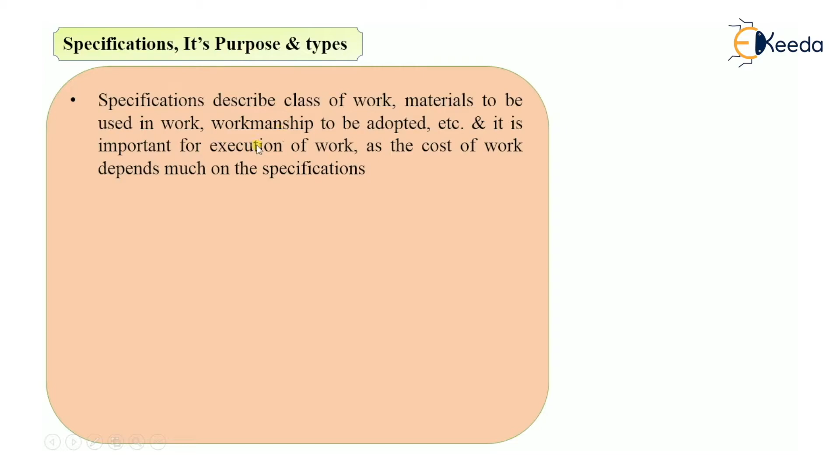Then what type of workmanship you should adopt for a particular item of work, that is described by the specifications. And see, it is important for the execution of work, as the cost of work will depend upon specifications. See, specification will give you nothing but the quality of material, what type of workmanship you should adopt. So mainly, what are the main factors that affect the cost of work? They are materials and workmanship. So as the specification describes the material and workmanship, the cost of work will depend much on the specifications and also on the execution of work.

And see, specifications are nothing but written requirements for a material, what type of material you should use, or written requirements for the service you are providing for a particular proposed project, such as buildings or bridges or roads, etc.

Then it also forms an important part of contract document. Why so? Because it gives you a proof about what type of material you are using, so you can compare whether your contractor is doing the work as per the contract document, as per the specifications, what quality of material is mentioned in the specifications. So whether the contractor is doing the work as per the specifications or not. So it will form a very important part of contract document.

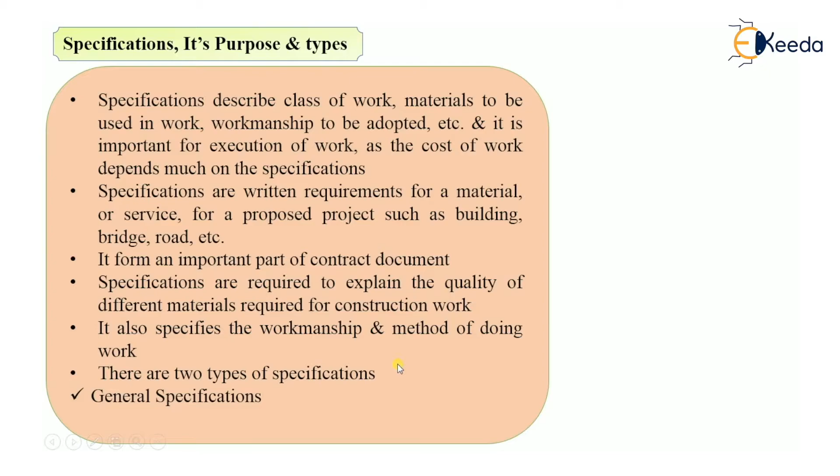And specifications are required to explain the quality of different materials. It will explain what quality of material you should use, each and everything about material. Then it also specifies the workmanship and method of doing work, as I told you previously. Then there are two types of specifications. First one is general specifications and second one is detailed specifications.

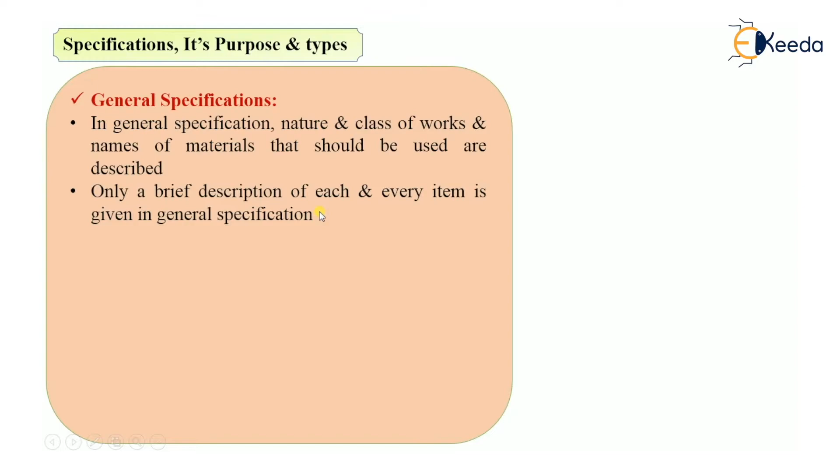Let's see first general specifications. See, in general specification, nature and class of works, then names of materials that should be used are described. What is described in general specification? Nature, class of work and names of materials. And see, only a brief description of each and every item is given in this general specification, not a detailed one. As the name says, it is a general specification only, so it will give you a brief description of each and every item.

And general specifications do not describe any particular item of work, but refer to the complete work. See, this is a very important point. General specification will not describe any particular item of work. It will just give the brief description about each and every item, and it will give total description about the complete work. It is useful for estimating the project, and it does not form a part of contract document.

As specification is nothing but a proof for the contract document, we cannot use general specifications in case of contract documents. So it will not form any part of contract document. You cannot use this type of specification in the contract agreement or contract document.

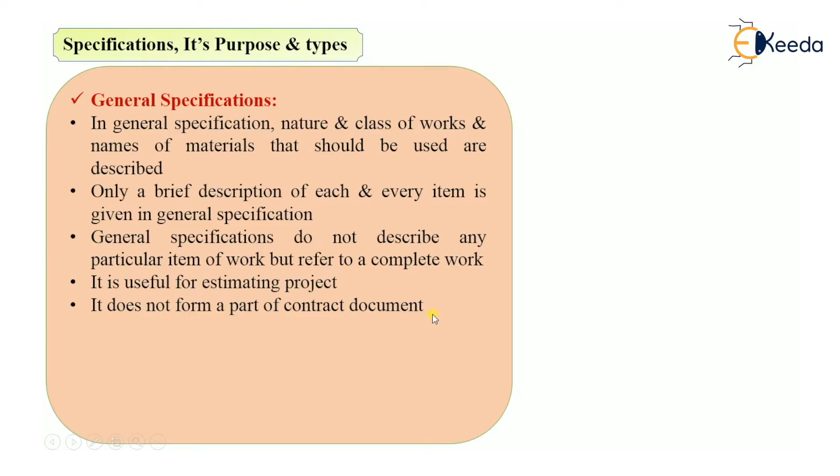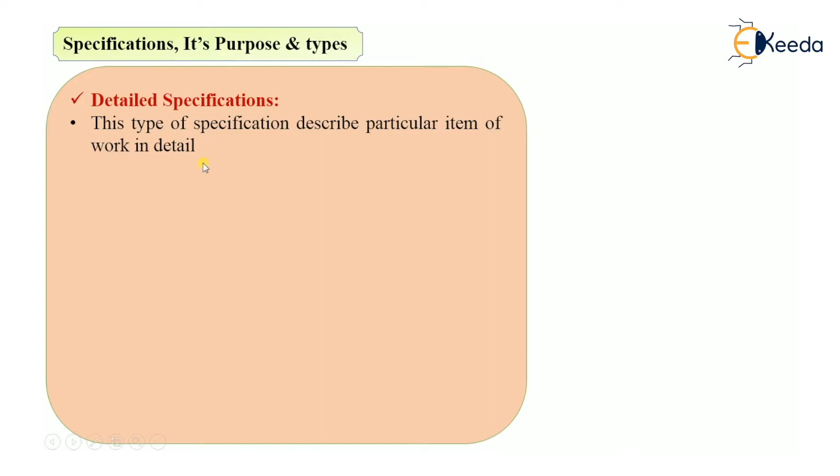Then the second type of specification is detailed specification. See, this type of specification will describe a particular item of work in detail. As the name says, it will give you the detailed description about the particular item of work. And the detailed specification will form a part of contract document, as it is giving complete guidance about the material to be used, workmanship to be adopted. It is giving complete description about that particular item of work, so it will form a part of contract document.

And detailed specification specifies the qualities, quantities, and proportion of material. What quality of material you should use, in what quantity you should use it, what should be the proportion of various materials, for example, if you are using concrete, what should be the proportion of concrete in a particular item of work? Then what is the method of preparation and execution of a particular item of work in a project? All these things are described in detailed specification.

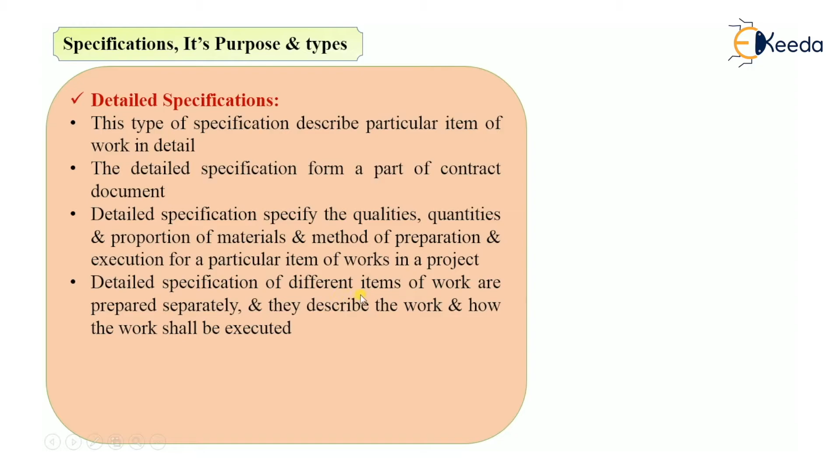Then detailed specifications of different items of work are prepared separately, because we have to give detailed description of each and every item. They describe the work and how the work shall be executed. In detailed specification, it is also given how you can execute the particular item of work or total work. While writing this detailed specification, the same sequence is maintained.

Remember this, whenever you are writing the detailed specification, the same sequence is maintained as the work to be carried out on site. Means if you are doing the excavation, then you are doing the PCC. So you are writing the detailed specification in the same manner as the work is to be carried out on the site.

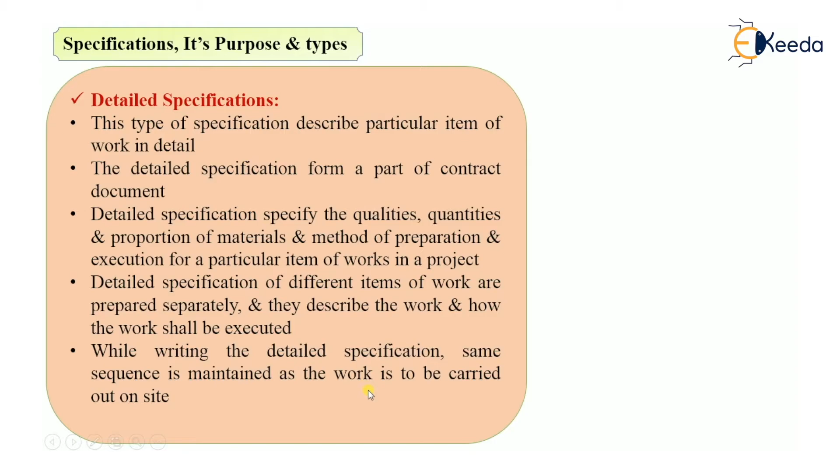Now let's see what is the purpose or what is the importance of specification. Why we use specifications? We have seen this in the description, but in the exam it may ask to write down what is the purpose of specification, what is the importance of specification. So from exam point of view, you have to write down some of the points, maybe 8 points, 10 points. So let's see them one by one.

What is the purpose or importance of specification? See, the main purpose of specification is to provide the description of work, necessary information which cannot be obtained from the drawings. As we know, drawings will guide you about the work, but there are some points which cannot be described in the drawings. So for that you will have to refer specifications. Specification will give you the description about the work which cannot be explained in the drawing or obtained from the drawings.

Then specification of work is required to describe the quality and quantity of different materials required for the construction work. As I told you in the previous slides, specification will describe what quality of work you should use, what quantity of different material you should use, and what proportion of material you should use in a particular item of work. Then it forms an essential part of contract document; especially the detailed specification will form a part of contract document.

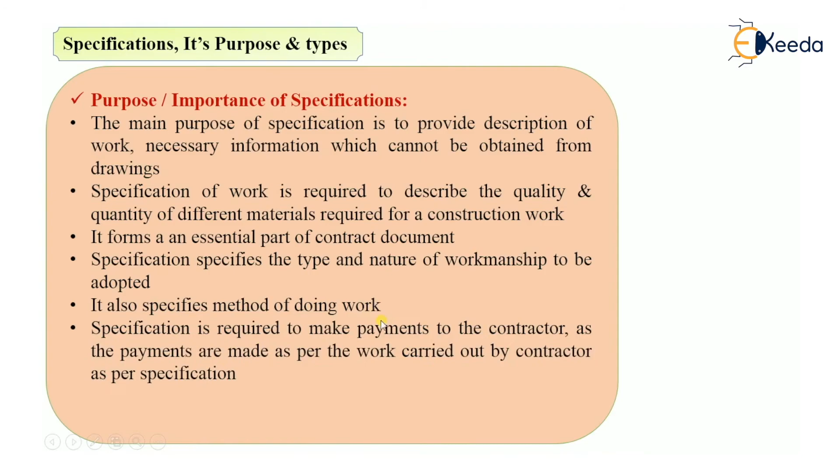Then specification is required to make the payments to the contractor. This is very important. The contractor will be paid according to the work done by him, whether he is doing the work as per the quality mentioned in the specification or not. So depending upon that, you will pay him. You can check whether he is completing a particular item of work or the total work as per the specifications or not. So specification will be very much required to make the payments to the contractor.

Then specification is also necessary to specify tools, equipments and plants to be engaged in a work. What are the various tools, plants and equipments you should engage for a particular work, that is mentioned in the specification.

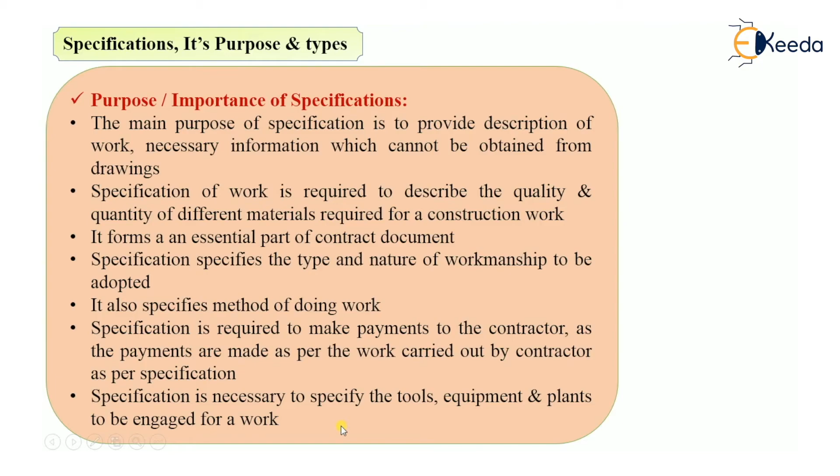Then specifications are also necessary to do the supervision of work. For example, a site engineer has to do the supervision work. So for the supervision work, what will he refer? He will obviously refer drawings and the specifications. So specifications are very much important at the time of supervision also.

Then specification of items of work are required by the contractor to fill the rates of items in the tender document. For example, when a contractor has to fill the tender document, he should know what quality of material or what quality of workmanship he will give to the owner. So specification will guide him when filling the rates, because he will decide the rates depending upon whether the quality of material is low, medium, or high quality.

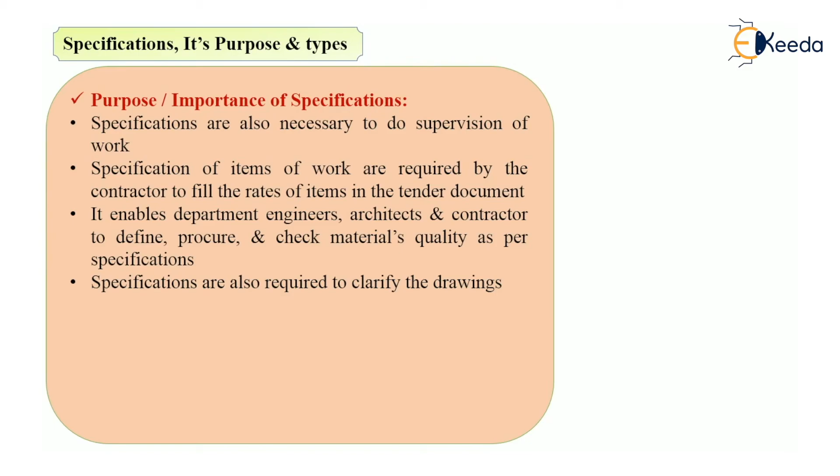Then it enables department engineers as well as architects and contractors to define, procure, and check materials quality as per the specification, whether the material quality is the same as mentioned in the specification or not. Then specifications are also required to clarify the drawings. For example, when some points are not clear in the drawing, it will help in clearing those doubts.

Then it serves as a guide to the supervising staff of owner as well as the contractor. As I told you, it will help in supervision of the work, so it will act as a guide to the supervising staff of owner as well as the contractor.

And last point, specification is an essential contract document which plays an important role at the time of arbitration and court cases. For example, there is a dispute between contractor and owner because the contractor has not used the same quality of material which was mentioned in the specification. So what will be the proof here? The only proof will be the specification, because it mentions that this quality of material should be used and this type of workmanship should be adopted. So it will help in arbitration between the owner and the contractor, and in court cases, because it will act as a proof.

So this was the video about specification, its purpose and types.